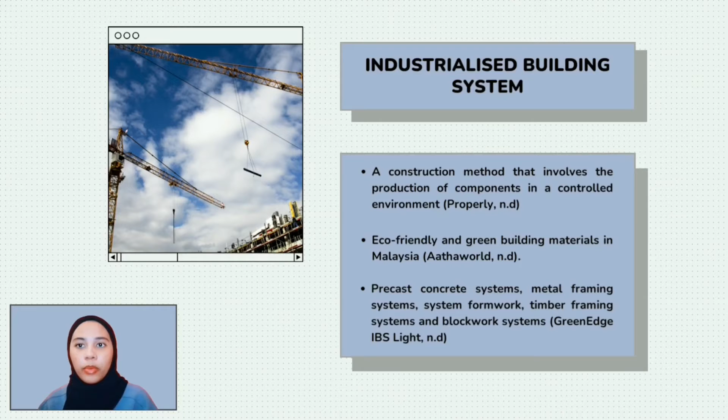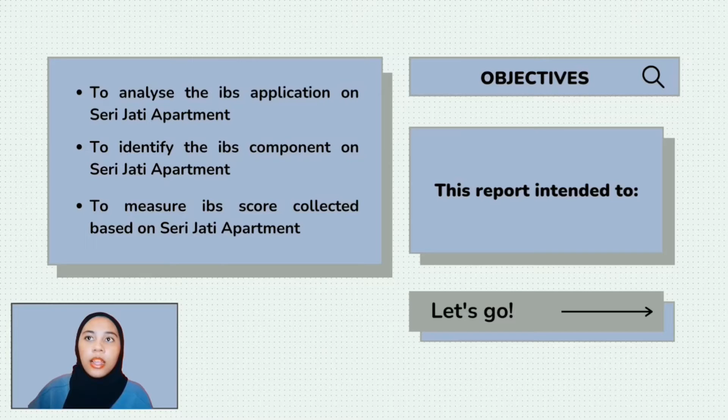There are also many types of IBS systems such as precast concrete, metal framing systems, system formwork, timber framing systems, and blockwork systems. Now, let's get into the objectives. The objectives for this report are: first, to analyze the IBS application on Seri Jati apartment. Second, to identify the IBS components used on Seri Jati apartment. Third, to measure the IBS score collected based on Seri Jati apartment.

Alright, next presenter. I'm Aisha and I will talk about the case study. The chosen case study is Seri Jati Apartment, located at Shah Alam, Selangor. The apartment was completed in 2014. It has 6 blocks. 3 of the blocks are 10-story high, while the remaining 3 blocks are 11-story high.

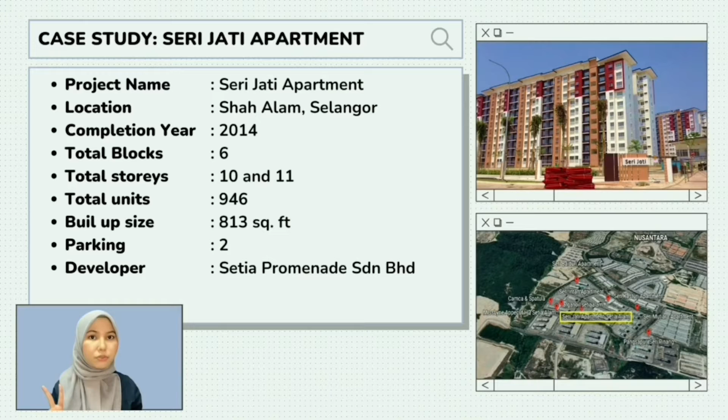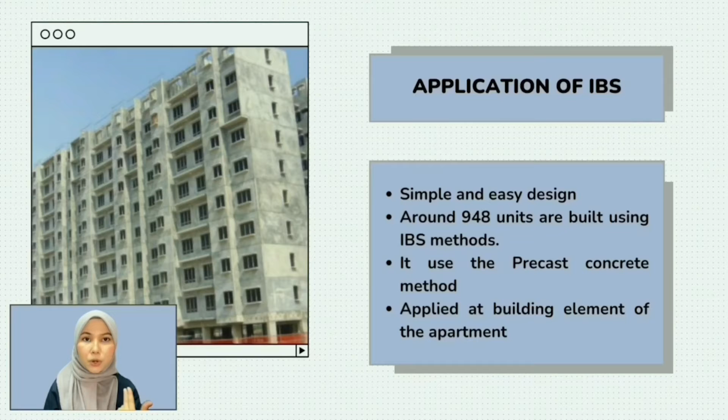For the application of IBS, the simple and easy design of the apartment made it suitable to deploy this system. In Seri Jati apartment project, around 948 units are built using the IBS method. The IBS system used in this project is the precast concrete method. This precast concrete method is applied at building elements of the apartment such as roof, wall, beam, column and floor slab. The apartment project adopts a precast construction method with standardized components to speed up the construction process while maintaining high quality.

The IBS application in this apartment building is influenced by a number of factors, including lowering the construction cost, reducing the number of laborers, shortening the duration of the construction process, and maintaining the quality of the apartment.

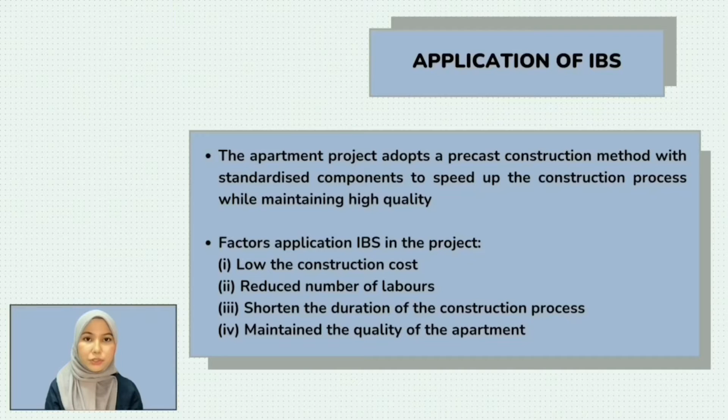Precast concrete column. Multi-story corbel columns or single floor-to-floor corbel elements are available in precast columns. Single floor-to-floor corbel elements are used in this construction because they are basic in design, detailing, and construction. They match the repetition features in the apartment design. Internal column and edge column profiles are used to support the walls in this structure.

Cast in situ pad foundation. In this construction, a cast in situ pad foundation is a type of foundation that is carried out on site to support point loads, such as a column and ground beam. Tension, compression, and shear force will be transferred to the foundation structure through anchor bolts.

Anchor bolts are drilled into the foundation pad before connecting the column with this approach to ensure appropriate connection. The precast concrete columns are then attached to the column shoe where the connection is made possible. This sort of connection does not require the use of bracing.

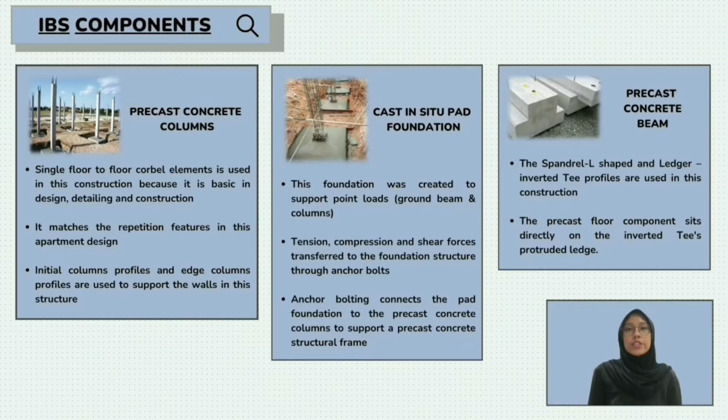Precast concrete beam. Precast beams are designed to be simple and practical. The spandrel L shape and a ledger inverted T profile are used in this construction. They are made to be continuous in order to improve further loads. The precast floor component sits directly on the inverted T's protruded ledge.

Precast concrete walls. The precast walls in this apartment have a similar face finish to cast-in-place walls. The door and window apertures are integrated into these wall panels. Connection points are marked on the precast wall panel, which are essential for supporting the apartment structure weight.

Load-bearing walls, which resist and transfer load, and shear walls, which provide lateral load resistance, are the types of precast wall used in this apartment.

Precast hollow core slab. Hollow core slabs were chosen for the apartment because they have the best span range, with a maximum span capacity of 2.4 kN per square meter across a 16-meter span. Direct costs such as transportation, and also indirect costs during installation and the method of connecting to the beam, all influence this optimal range.

These slabs are quite effective. Unlike other floor types, they can attain a high span-to-depth ratio. To connect the structure together and provide diaphragm action in the floor system, hollow core slabs are covered with a structural screed. This slab can also be reused and recycled at the end of its life cycle.

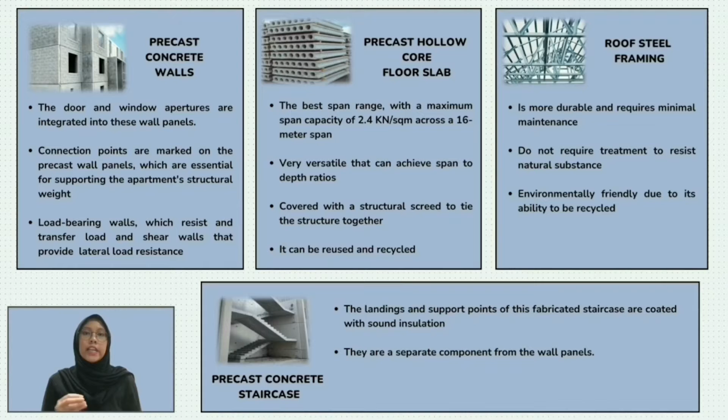Precast concrete staircase. This type of precast staircase is used when a complete flight with a certain number of steps is required. The landing and support points of this fabricated staircase are coated with sound insulation. They are a separate component from the wall panels.

Suitability of precast concrete columns. Multi-story apartment buildings benefit from precast concrete columns. During the manufacturing process, quality may be monitored. Not only that, but the building time may be short. By having intentional manufacturing that maintains consistency in connections carrying load from other structural components, precast concrete columns can reduce building costs. Precast concrete columns are also flexible in a variety of sizing and configurations.

Cast in situ pad foundation. Versatile for simple connections, it does not require complicated connections, which might lead to further complication. Fabricated and reinforced to withstand heavy construction stress, the cast in situ pad foundation is able to withstand higher load from the building.

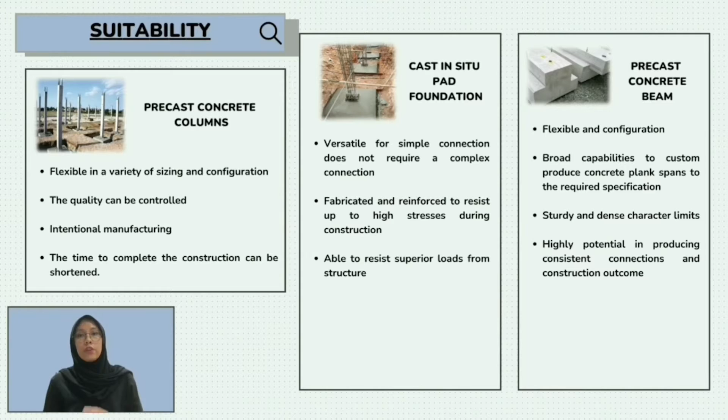Precast concrete beam. Precast concrete beams are flexible and configurable. They have a wide range of capabilities for designing concrete plank spans to fulfill specific requirements. The column shape influenced the design of the beam. L and T precast concrete beams were used in this apartment. It has a lot of potential for producing reliable connections and construction outcomes. Because of its sturdy and dense structure, noise transfer from floor to floor is limited, which is ideal for this apartment.

Precast concrete wall. Precast concrete walls are energy efficient because of their high thermal mass, which helps keep the building cool. They possess load-bearing capabilities that act as a lateral stabilizer for structural loads from roof and wind. Long span concrete walls will be more durable if they are reinforced with steel.

Precast hollow core slab. The precast concrete hollow core slab is suitable for the apartment as the tubular voids significantly reduce the weight of the slab while maintaining the strength. This results in an efficient lightweight unit that's suitable for resisting the bending moment from loads in this apartment. Its long span capability is great for this apartment.

It is made up of pre-stressing tendons that give a predetermined force to withstand external load and cracking. It acts as a sound and fire barrier. Also, electrical installation does not need drilling.

Roof steel framing is suitable for this apartment as it is insusceptible to shrinkage, termite infestation, rotting, and warping. Steel roofs can also be installed in poor weather, eliminating expensive downtime. Prefabricated steel roof structures also reduce cost and labor time as workers only take care of assembly. Being lightweight, it can reduce transportation costs, and it is highly resistant against weathering and insect infestation.

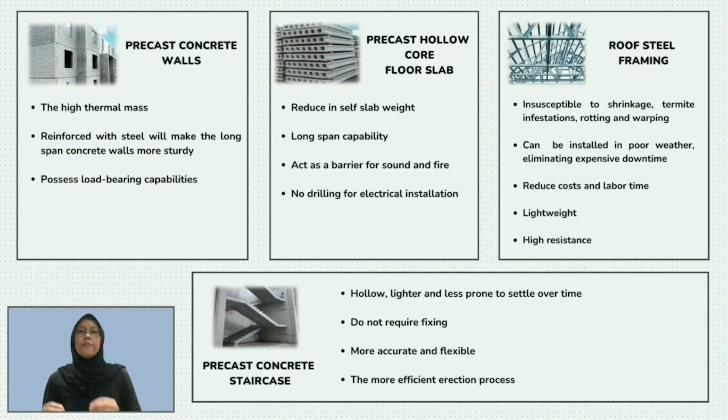Hello, I'm Muhammad Akmal. Here I will explain about the fabrication process in Seri Jati apartment.

Fabrication process has been part of many systems in construction, especially for precast systems. It existed and evolved through multiple methods based on the construction type to be suited with the structure needed. In Seri Jati apartment, there are two systems being used: precast system and prefabricated system. The primary material for those two should be concrete and steel.

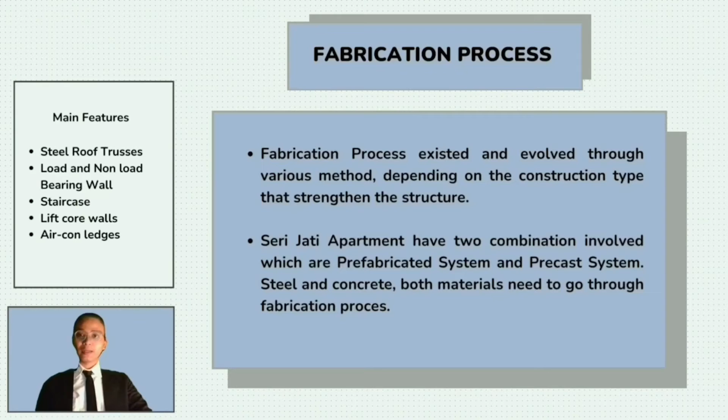In this subtopic, I will explain in general and in detail about 5 main features involved in Seri Jati apartment, which are steel roof trusses, load and non-load bearing wall, staircase, lift core walls, and aircon ledges. I chose to explain these particular elements because of the unique fabrication process that differs from others.

For precast system, concrete is the main material. The process in general for fabrication involves 7 steps. Like in the factory, the worker will be assembling the mold first, based on what criteria and type of element they want to make. The mold then will be prepared by doing a first inspection to make sure the mold is clean from any debris before continuing.

If the mold is good to go, the worker will assemble the rebar according to the elements. This is because the number of rebar will vary from one to another due to different dimensions. The second inspection will be done to secure the reinforcement bar's accurate positioning. When the rebar is fixed, the concreting process is good to go.

The worker will spread the concrete that is poured by the machine or by doing it semi-manually, depending on the factory equipment. The last inspection will be done during the curing process to oversee the hardened concrete and make sure it is in good condition without any porous areas.

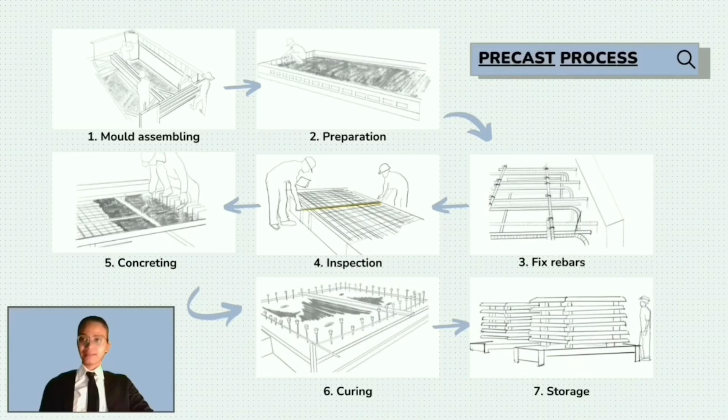Several days pass, and the worker will carry the precast element to the storage using mechanical assistance to carry it, then tag or mark it with a code to make the storage process easier.

I have done with the general process. Now I will explain deeper about the details on the Seri Jati apartment for the fabrication process. The early 4 of the main features will be the precast system.

Going on to the first feature, precast load and non-load bearing wall. Do the levelling to check the flatness of the base for the wall before assembling aluminium and steel mold. Check the mold is free from any debris and clean it if there is any. Pre-stressing strands like sleeve pipe and lifting hooks should be fixed into the correct position. Do the primary vibration and vibration test.

Pour the mixing concrete into the mold and flatten the poured concrete, then observe the curing time. When the concrete hardens, open the bolts and nuts of the mold slowly and do a final inspection to check the final condition. Both load and non-load bearing walls go through the same process but in different types of mold due to functionality.

Next, precast staircase. Set up a timber formwork for the staircase, then make sure the mold is clean from any debris. Place the reinforcement bar into the timber mold, then pour the concrete and vibrate it to equally flatten the concrete. After that, check the curing process of the concrete for the stair slab. Then, the precast staircase is ready to transport to site based on the required dimension.

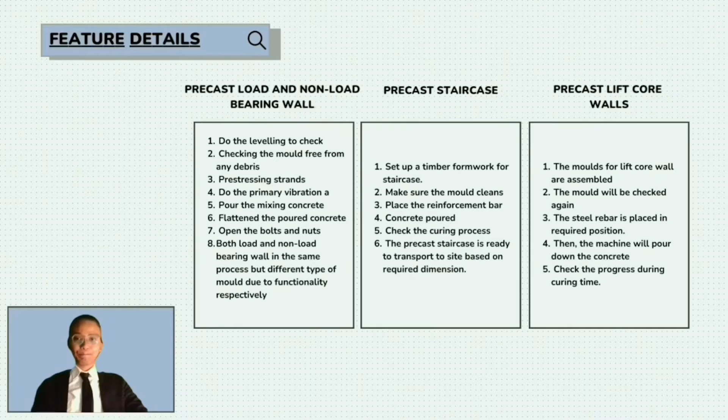Next, precast aircon ledges. The first one is prestressed ledges coming from fabrication on casting beds. The strands for all beds are tensioned. Get ready a mixed concrete and pour into the beds and cover the reinforcement bars. Frequently check the curing progress to avoid any major honeycombing, and fit it to each ceiling plug.

And the last one, prefabricated steel roof trusses. The first step is the automated decoiler will flatten the raw material of metal strip into the roll former. The roll former then will be bent by the C-channel steel profile. The C-channel steel will be cut, punched, and measured based on dimension. The finished steel product will be assembled per individual parts, and bolts and nuts were used as a connection detail on all parts manually.

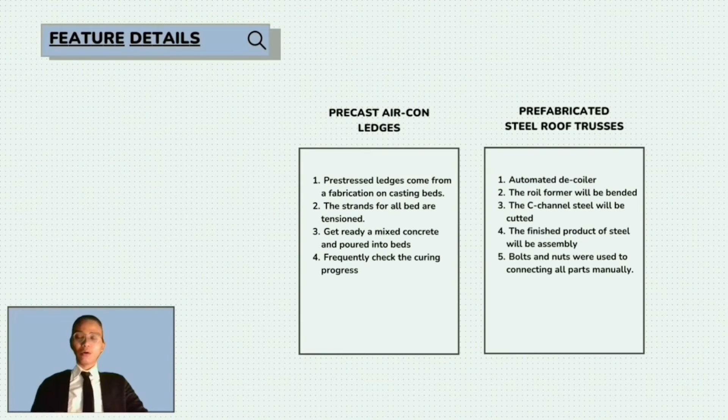Moving on to another subtopic, which is connection details. In construction based on precast systems, which is concrete structure, it involves an important aspect: connection details of every precast element to be suitably connected together. For such structures, this needs to be considered in the design of joints and connections.

There are many types of connection details that can be achieved in precast construction, such as bolting, welding, and grouting. Based on the figure, all the components used for Seri Jati apartment can be included, such as beam to column, column to column, and column to base through pin or rigid connections. This is because the connection detail material must be designed to endure natural or man-made loads, to be compliant with strength, ductility, reliability, and stiffness.

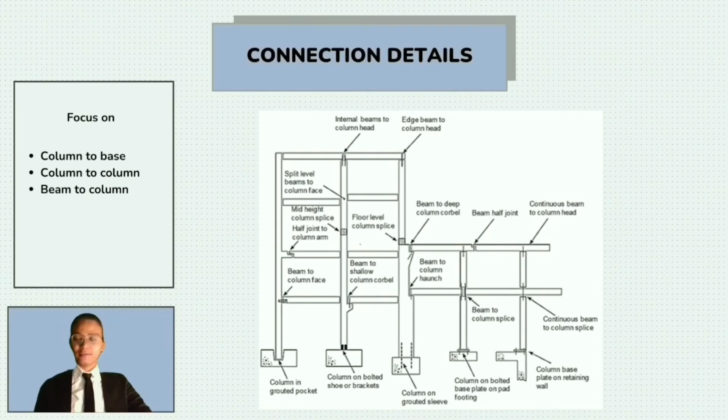The first major connection will be column to base connection. There are three types of connection for column to base: grouted sleeve, pocket foundation, and steel base plate. Through several readings, Seri Jati apartment confirmed the use of grouted sleeve, which is commonly used in various precast concrete construction. The important thing to consider is making sure the connection is suitable for the structure, and as this type of apartment, it is the best option as the chosen design.

If we look at the figure, it shows that the precast column comes with a corrugated sleeve. The common unit usually has 4 sleeves that hold the projecting bars which are connected to the base. To do so, non-shrink grout, which is water resistant, will hold it in place to make sure the bars stay in position. This is because the column must stand accurately based on the engineer's drawing.

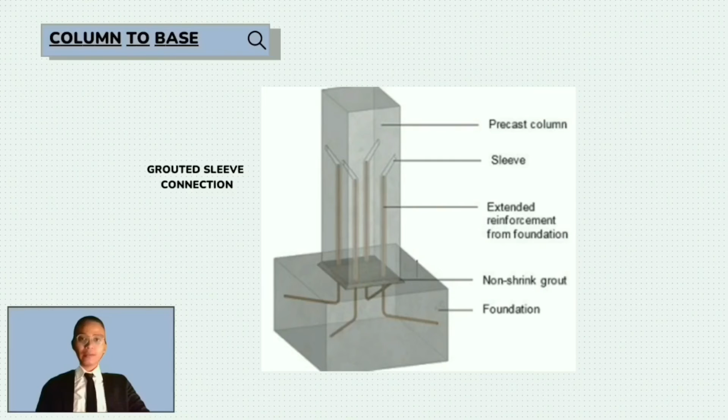The second major connection detail is column-to-column connection. Structural forces are the main concern for high buildings like Seri Jati apartment. When it comes to column to column, the joint design should be installed by pin or moment connection. Look at this figure.

There are two separate columns. On top is a precast column that comes with a sleeve. It will connect with extended rebar from the bottom precast column that is already fixed. From here, the column above will be positioned, then the extended rebar will enter the column with sleeve to lock the joints. This establishes a strong bond length, tying bars in grouted joints. Grout should be pressurized to make sure the steel bars are well connected.

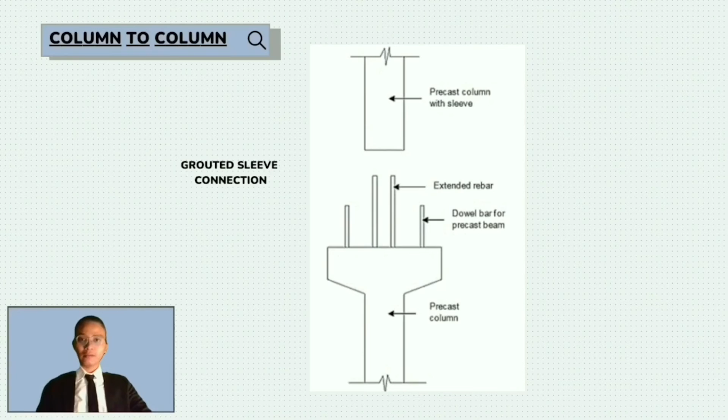The last major connection detail is beam to column connection. To connect between beam and column, we actually have the simplest method among the others. Since these are the two major superstructure parts that use the precast system, allowing tension from the overall building to be transferred through, it becomes the most important element. In this particular section, precast system with a mix of in-situ connection fills the gap and holds it together. To do so, a hidden connector, shown in the figure, is used.

The corbels were used to support the beam by placing it on the column. The precast beams come with a reinforcement bar to attach the projected link. Once connected, the column corbel will attach to the beam bearing pad to set a footing area. The column dowel bars are connected with beam and column, filled in by in-situ concrete.

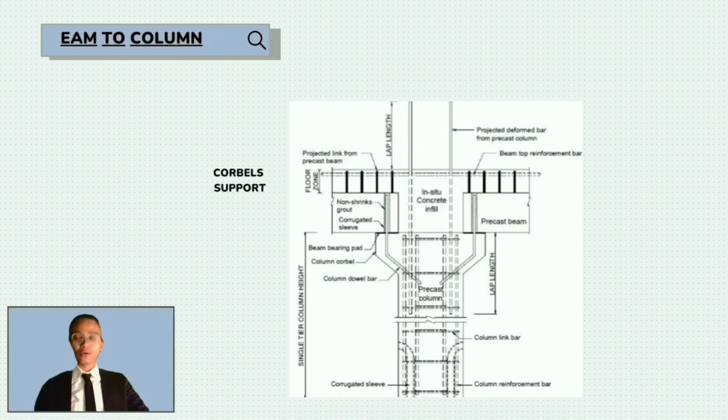In this section, let's look at the IBS process for the Seri Jati apartment. This work begins with the foundation, built in situ. The contractor started foundation installation with the excavation process at every point of the foundation. Next, precast concrete columns are installed; this component was installed at every column stump.

Moving on to the ground floor slab, it was constructed in situ. After that, the precast concrete wall components are installed. There are two types of precast concrete wall used in this project: load-bearing wall and non-bearing wall. Then, the precast staircase was installed on the precast wall.

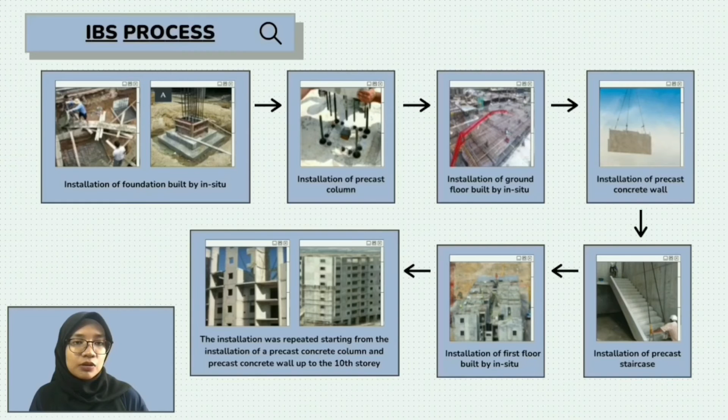The slab for the first floor is installed in situ. The construction installation was repeated, starting from installing the precast concrete column and the precast concrete wall, up to the 10th story.

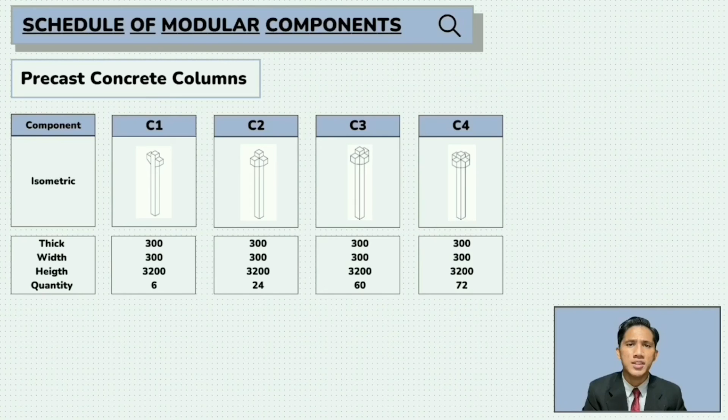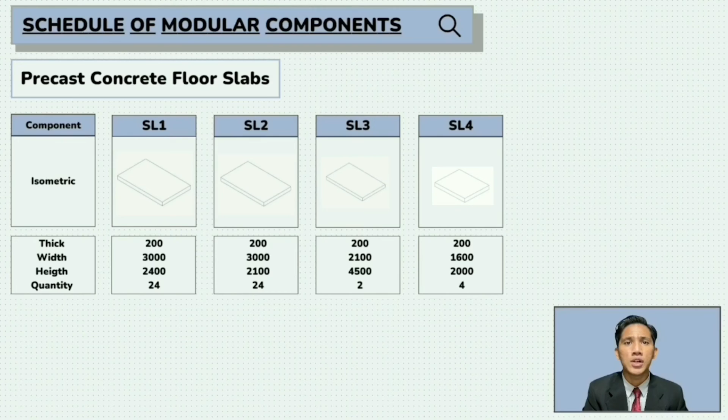Next, for the precast concrete floor slab, the building will have up to 4 types of slab. Each one will have the same thickness of 200mm but differ in width and height. The quantity will also differ for each one.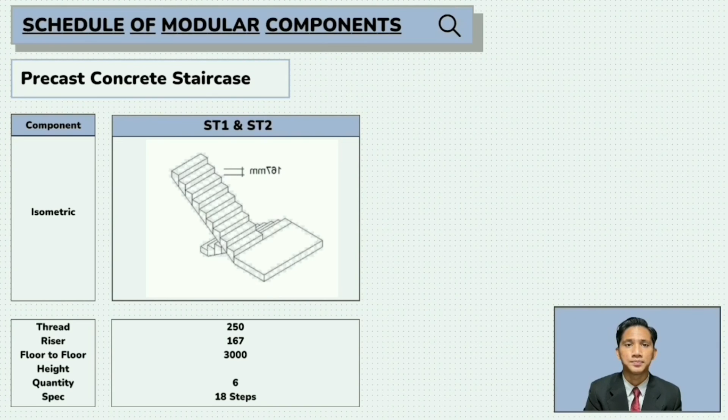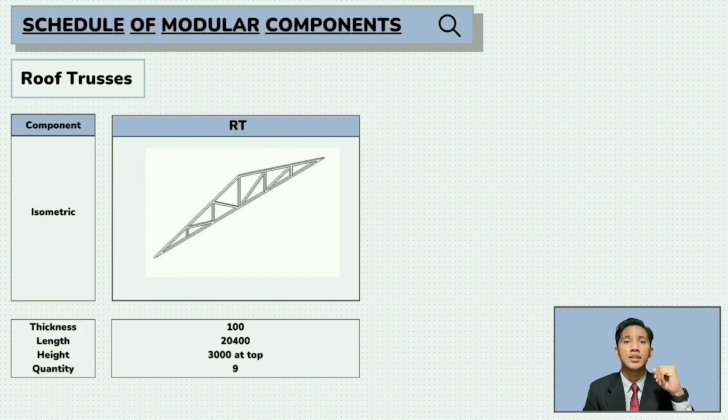Lastly, the roof trusses will use the metal type of truss with 100mm thickness, for a length of 20,400mm with 3000mm height at the top.

So the total score of IBS for the Seri Jati apartment is 81%. This total is contributed by the IBS score part 1, the element of structural system, at 39.1%; part 2, the element of wall system, at 18.8%; and part 3, other simplified construction solutions, at 24.0%.

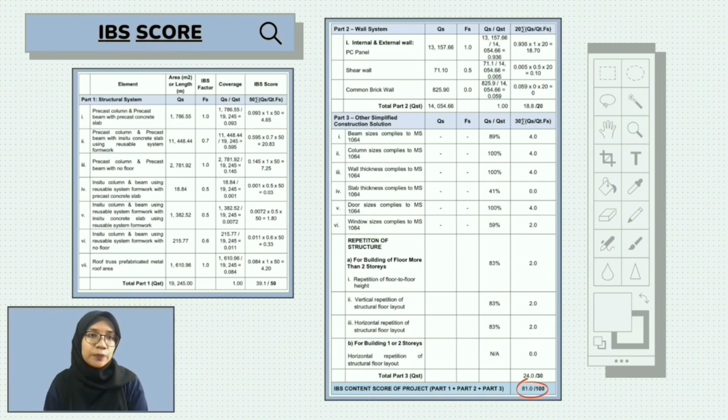In conclusion, this strategy can save a lot of money, and the best thing is that it can prevent any waste from the beginning of the construction process.

In 2014, the apartment was completed. It consists of 6 blocks, 3 of which are 10 stories high, while the remaining 3 are 11 stories high. There are 948 units in the complex, each with a total built-up space of 813 square feet, with 3 bedrooms and 2 baths.

This apartment incorporates design elements. It features a simple geometrical design, and a rectangular grid as the optimal grid arrangement. It also has a repeating pattern. A structural precast skeletal frame with columns and beams, as well as a precast floor system, are included. The frame of this structural system is moment resistant.

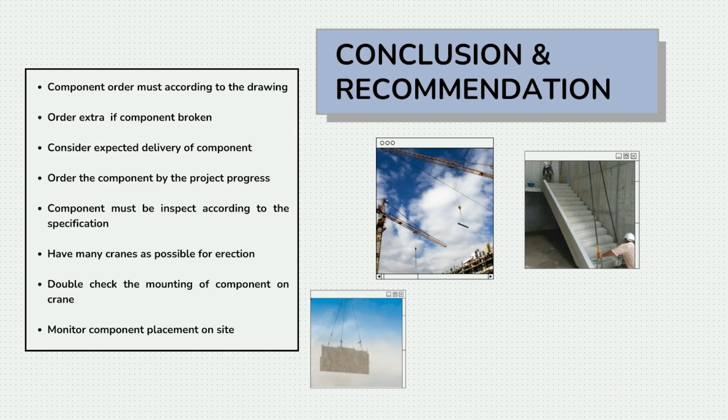In this design, the IBS criteria were considered, which informed the IBS component selections. This project has an IBS score of 81%.

Like every other construction, there are always complications and snags in the project. It is recommended that coordination for the project be textbook perfect and faultless in handling all the IBS component installation. The project management team needs to ensure the components are akin to the design in the drawing.

The project management team also needs to consider ordering extra components beyond the calculated number, for contingency if a component is broken during installation. The ordering also needs to consider the expected delivery on site, so the components won't take up too much site storage once arrived.

Meanwhile, component delivery to the site needs to be done in time with the project planning to ensure no delay occurs. Once arrived on site, the components need to be inspected by the quality engineer to certify they comply with the specification for the building plan.

It is also recommended for the project to have many cranes available during erection of the components, as this can speed up installation work, reducing the time needed. The mounting of components to the crane needs to be double-checked to guarantee the component will not fall during the transfer process.

The placement of the component should be monitored by the site supervisor to ensure that the component is fitting into its placement according to the drawing.